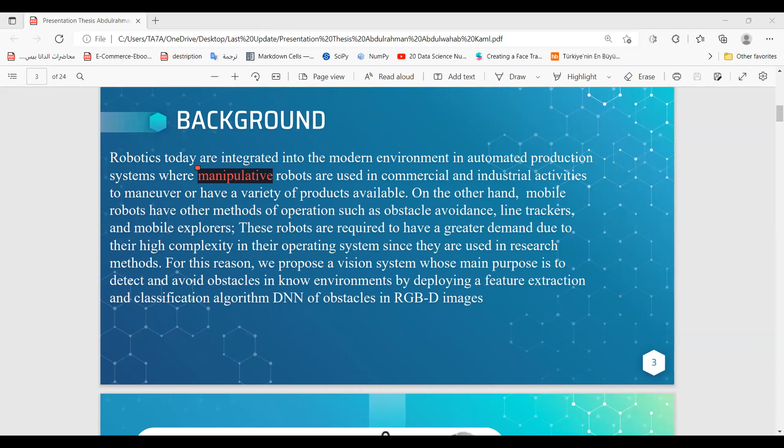If you want, let's start the first session of the symposium. The first paper belongs to Abdurrahman Abdul Wahab Al-Ahami. Are you ready? Hello. Hi. Are you ready? Yes. Okay, you can start your presentation please. Okay, let me open my camera. You can share your screen. Okay. You have 10 minutes, please. Okay.

Robot path planning with avoiding obstacles in a known environment using area segments and obstacle classification.

Introduction and background: Robotics today are integrated into the modern environment in automated production systems where manipulator robots are used in commercial and industrial activities to maneuver or manipulate a variety of products. On the other hand, mobile robots have other methods of operation such as obstacle avoidance, line tracking, and mobile exploration. These robots are in high demand due to the complexity of their operating systems, since they are widely used in research methods.

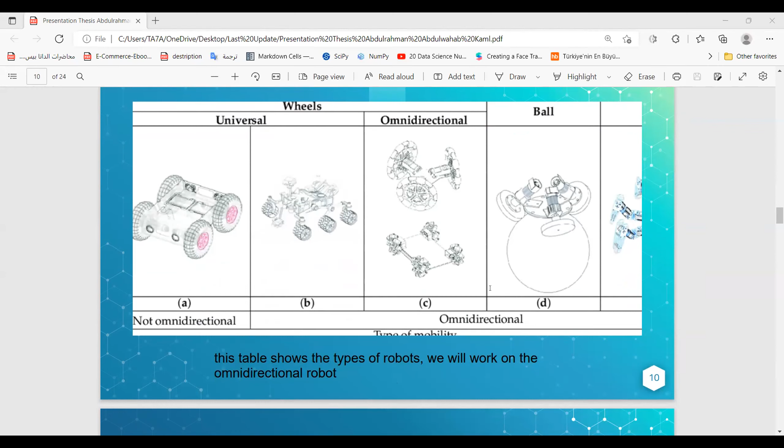Next slide: Obstacle avoidance. A mobile intelligent robot is a useful tool which can lead to the target and at the same time avoid obstacles facing it. There are conventional methods of obstacle avoidance such as the path planning method, the navigation function method, and the optimal regulator.

The first algorithm that was proposed for discussion of obstacle avoidance is the Bug One algorithm. This algorithm is perhaps the simplest obstacle avoidance algorithm. In Bug One, the robot completely bypasses the first object, then leaves the object and proceeds at the shortest distance toward the target.

Of course, this approach is very inefficient, but it ensures that the robot can reach any target using this algorithm. The current sensor readings play a key role. The weakness of this algorithm is the excessive travel of the robot alongside the obstacle.

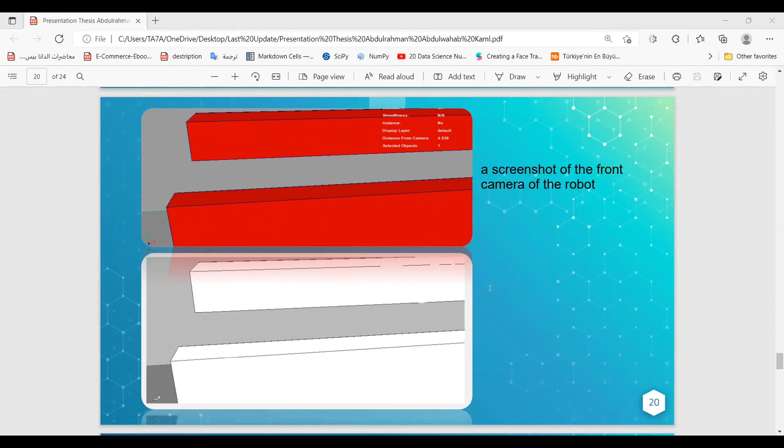Next slide. Accuracy result. Despite the fact that PSO KNN might not be the most accurate classification system, the figure below indicates that it takes the least amount of time to make choices compared to other classification systems.

Next slide. The accuracy of our model compared to other work.

The next slide, conclusion. This is the outline. This study proposed a new image-based floor detection approach in an indoor environment for autonomous mobile robots. Obstacles were detected using image segmentation and KNN classification.

Second, it should be noted that even if the obstacle and the wall are similar, the obstacle can easily be separated from the wall.

Third, additionally, as the proposed method does not require any prior knowledge of the environment, it can be applied to real-time problems.

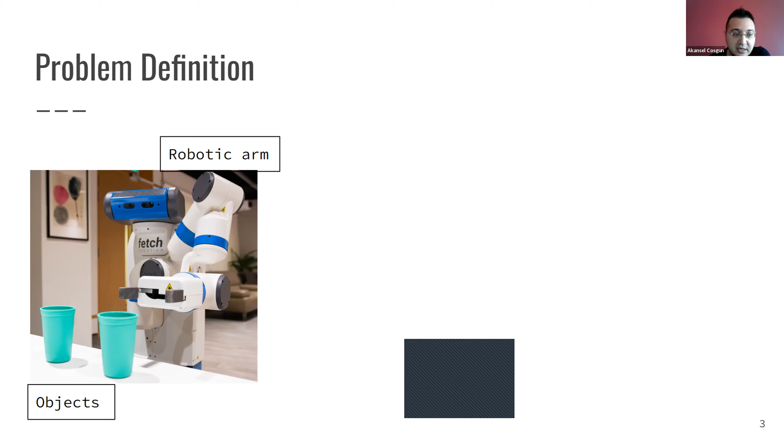To define the problem, we have a robotic arm. This picture depicts the Fetch robot. The Fetch robot is actually a mobile manipulator — it has a mobile base, but we do not use the mobile base, we only use its robotic arm. We have some objects on the table, and we have a user at a remote location who wants to control the robot.

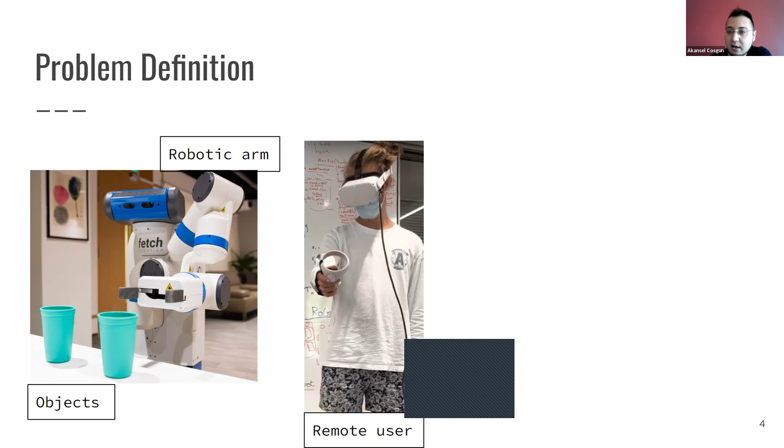This remote user is wearing a Meta Quest 2 virtual reality headset, and on the bottom right we see a typical VR view of what the remote user is seeing.

So the problem is how do we design the interface, the interaction, so that we share essentially a shared control, so that the user does not control every aspect of the robot. There is some autonomy that helps the user carry out the task, to be able to manipulate objects in the environment. Here's our approach.

We use a VR headset, a Fetch robot, and there's an RGB-D camera at the head of the robot. We visualize the sensor data in two forms: we project the point cloud into 3D space, and we also show the video stream projected onto a wall in virtual reality.

The control happens by the remote user choosing and setting the next waypoint, where we define the waypoint as a position and orientation of the robot's hand, the end effector. We check for the feasibility of the next waypoint and communicate that via visualization to the user, whether it's feasible or not. In the back end, we use a general purpose motion planner to check for feasibility and to move the actual arm.

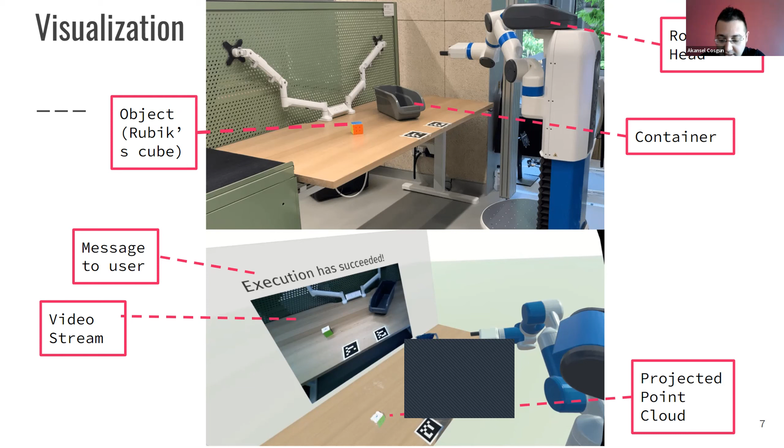Motion planning is responsible for solving for the joint positions of the robot arm to go from one robot configuration to another robot configuration.

In our design, when the user moves the controller, we visualize the robot's end effector in that location, but nothing happens until the user presses a button. When the create plan button is pressed on the controller, we check for the feasibility of that end effector configuration. If this pose is feasible, then we display the end effector as green. If not, we display it as red, so the user knows whether it's feasible or not.

In the back end, we use MoveIt, which uses RRT-star for motion planning. If a feasible trajectory is found, the user can press another button to execute the trajectory, and then the actual robot arm moves. The idea is to have human-in-the-loop control, doing this iteratively multiple times until the user reaches a desired goal position. We also have another button on the controller to close and open the gripper accordingly so that objects can be manipulated.

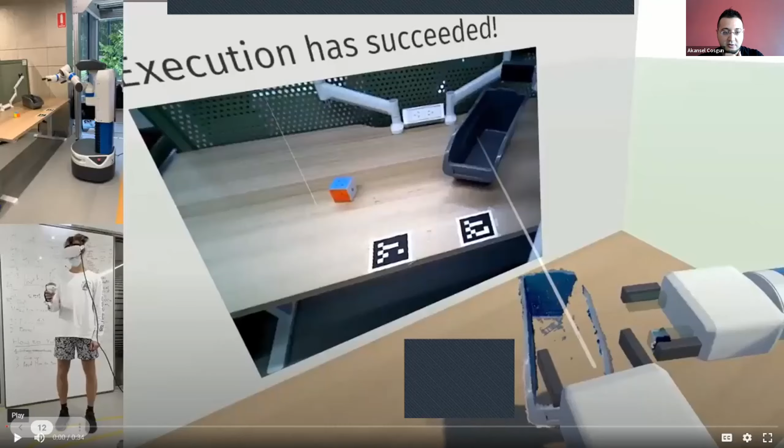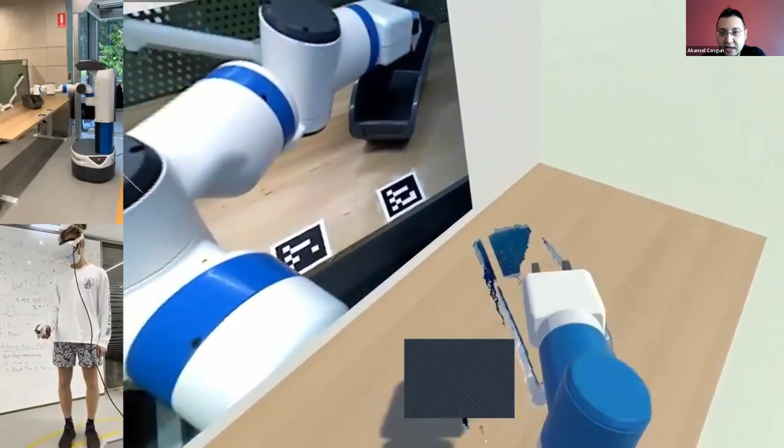Hopefully this works. On the right, the larger screen, you see the virtual environment. On the leftmost, you see the actual robots. So what the user is trying to do at this stage is move the arm to pick up the Rubik's Cube, essentially trying to find feasible arm locations. Then the arm will descend to a position to pick up the cube. The user sometimes uses the point clouds, sometimes the video stream, then moves on top of the container and opens up the gripper.

So there are limitations to the current work. For instance, sometimes the visualized point cloud is incomplete, and that's because the robot arm itself might block the view, coming in between the RGB-D camera and the object of interest.

So there are ways we have thought about this. For example, we can move the arm more intelligently so it doesn't block the view, or we can detect the objects on the table and show their 3D object models to help with occlusions. Or we can combine multiple point clouds from multiple viewpoints. However, this will only work if the robot is stationary and not mobile.

The other main limitation was that the user tries checking the feasibility multiple times, which is time consuming. A single manipulation action takes a long time, even for trained operators. So the idea is, in the future, if we can add more autonomy to suggest kinematically feasible options to the user before they try them.

To conclude, we have found that integrating the system was actually a lot of work, and the remote teleoperation was difficult and rather slow. This is why better and more careful user interface design is necessary for simultaneous interaction for this task. Our approach was a first step towards this direction.

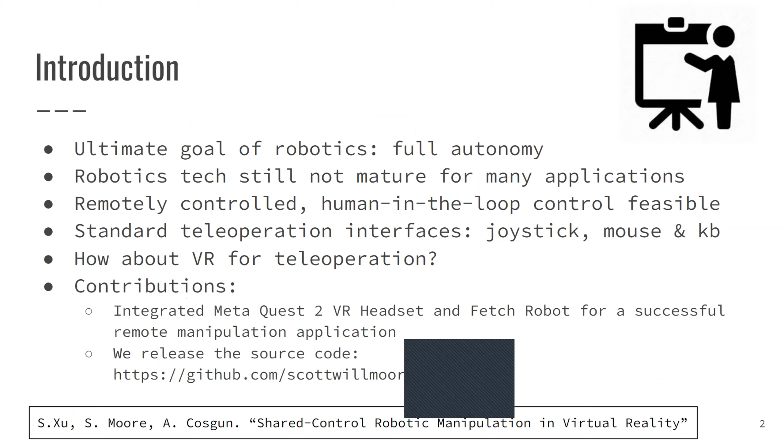Sure. Yeah, I like the presentation, the idea here for the virtual reality. In terms of the robotic gripper, I mean in terms of the grasping, have you tried any other gripper for this specific issue?

Well, we only tried a parallel gripper, which comes by default with the Fetch robot. However, I think if we had like a vacuum gripper or a more multi-fingered hand, the user might need, or we might need to add more autonomy to plan for the fingered motions, for instance. So we deliberately used a simple gripper for proof of concept, but I think it's an interesting problem how to tackle this with a different gripper.

Yeah, you are right. Because from my side, I work on soft robotic grippers. Maybe it could be great to try this kind of gripper in this issue. Yeah, interesting, maybe in the future. Thank you for the question. Yeah, thank you. Okay, thank you.

Any other questions? Okay, well, thank you for the opportunity. Thank you for your presentation again. Thank you, I wish you success in your career. Thank you.

The next study belongs to Omar Al-Mutalbi. Dear Omar Al-Mutalbi, are you ready? Mr. Savaş Dilibal, are you ready to present? Maybe your voice is... Oh yeah, okay. Can you hear me now? Yes. Yeah, sorry, my voice was off.

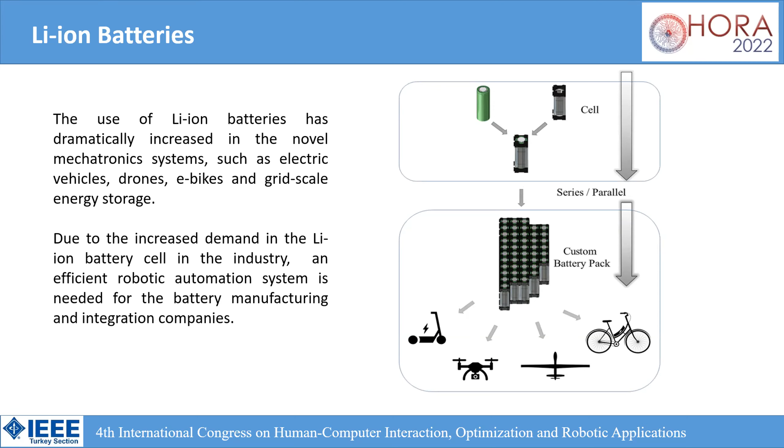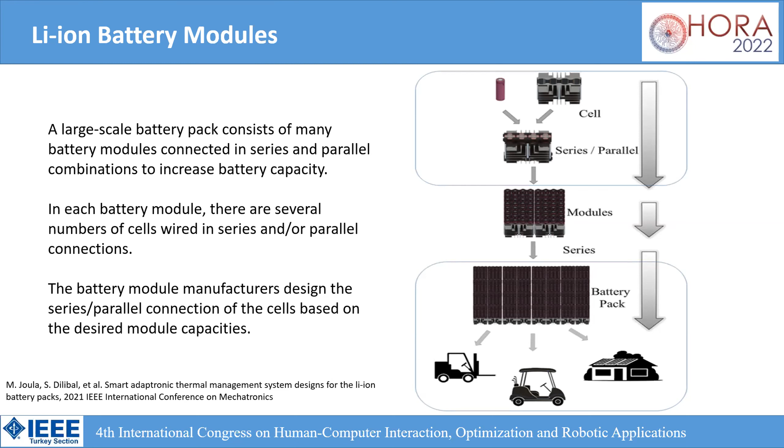A large-scale battery pack consists of many battery modules connected in series and parallel combinations to increase battery capacity. In each battery module, there are several numbers of cells wired in series and parallel connections. Battery module manufacturers design these connections based on the desired module capacities.

In industry, lithium-ion batteries come in coin, cylindrical, prismatic, and pouch formats with different capacities and sizes. The cylindrical cell is the most widely used package type due to its standardized sizes and simple manufacturing process, making it the most commonly used battery in applications.

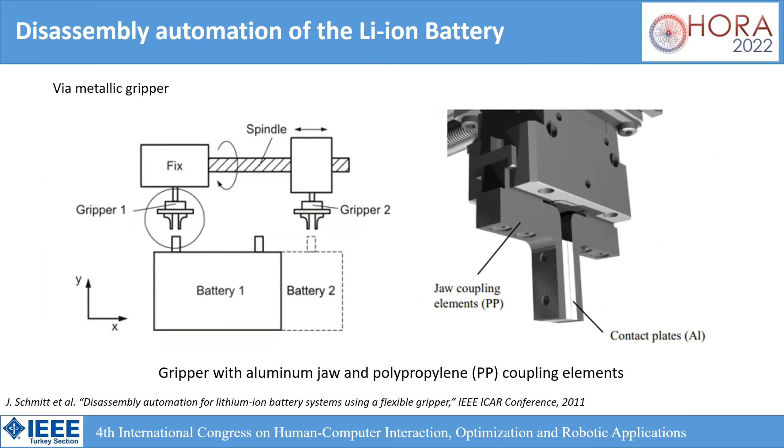In the literature, you can find some disassembly automation of lithium-ion batteries, as shown on the slide. Packaging and pick-and-place of lithium-ion battery cells can also be found in industry with metallic gripper jaw systems.

However, soft robotic grasping for lithium-ion batteries has different advantages: reducing the damage risk compared to rigid grippers, self-insulated soft robotic gripping for pick and place tasks, easy integration with collaborative robots, and coherent operation with cobots in active and passive missions.

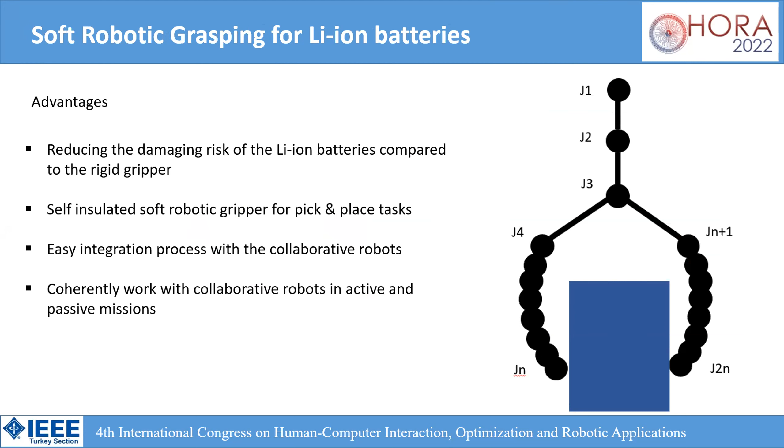In this study, we worked on a FANUC collaborative robot with a 10-kilogram payload, and we developed a 2-finger soft pneumatic gripper, which is additively manufactured and integrated into the cobot system. A silicone layer has been bonded on each finger surface for soft grasping.

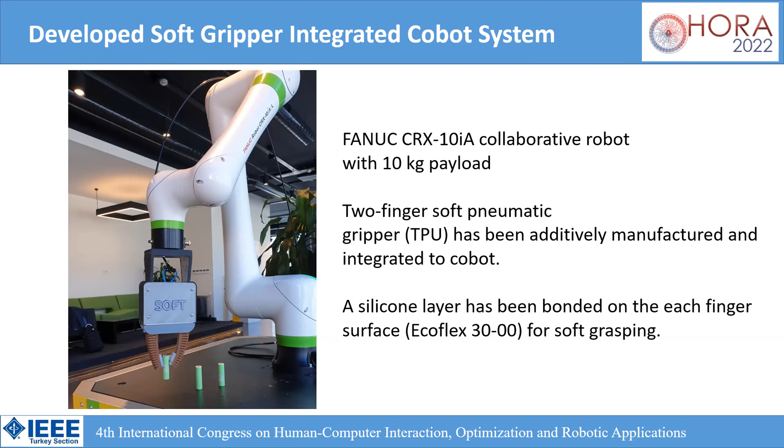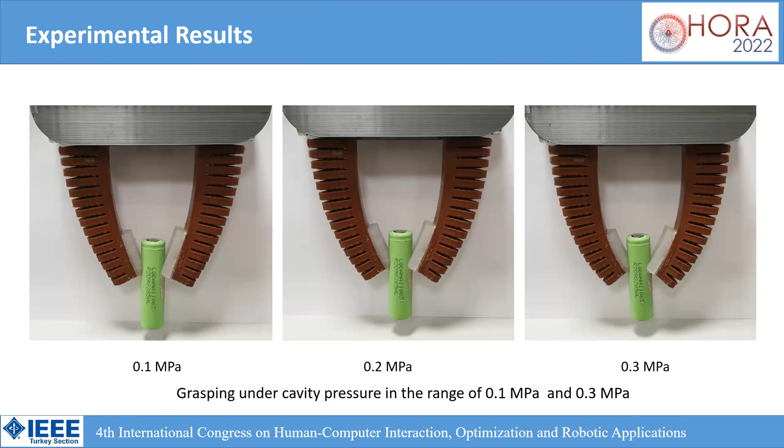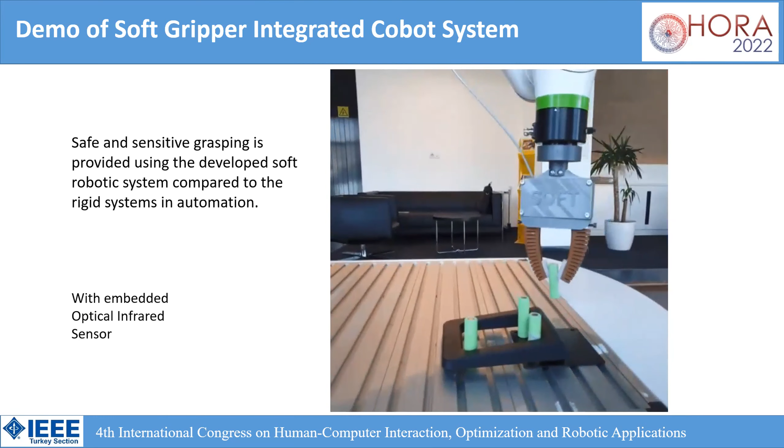In this slide, you can see a demonstration of the soft gripper integrated cobot system. Safe and sensitive grasping is provided using the developed soft robotic system compared to rigid systems in automation.

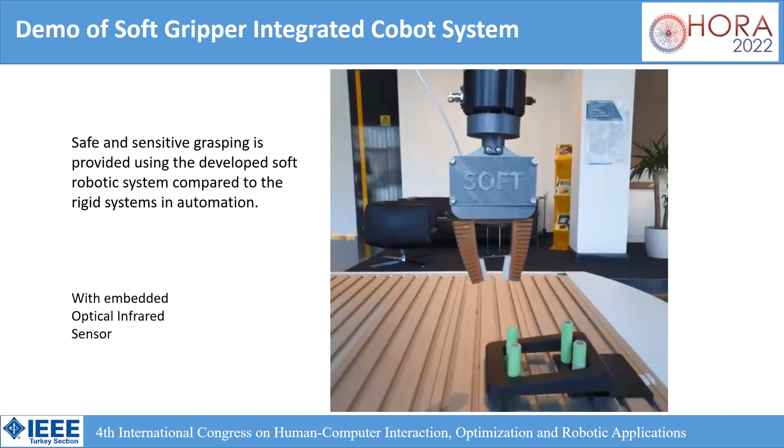We have used an embedded optical infrared sensor in this system. Here you can see the infrared optical sensor data up to 5-fold, which is embedded into the silicone layer.

We have also measured the gripping force, and you can see the plot of applied pressure versus gripping force here with our experimental setup for measuring gripping force.

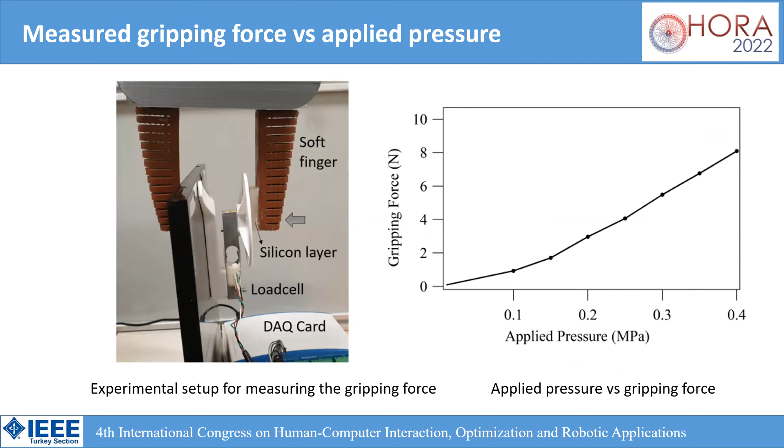In conclusion, the grasping of lithium-ion batteries was achieved successfully using the additively manufactured soft pneumatic gripper with contact sensing, limiting both damage and slippage.

The Yeoh material model-based numerical results accurately predicted the experimental responses of the soft pneumatic gripper at cavity pressures up to 0.3 megapascal. The control architecture is built with data from both exteroceptive sensing and FEM to accurately regulate the cavity pressure in the grasping task.

In future work, an enhanced multidisciplinary collaborative effort will be given to achieve in-field studies. Thank you.

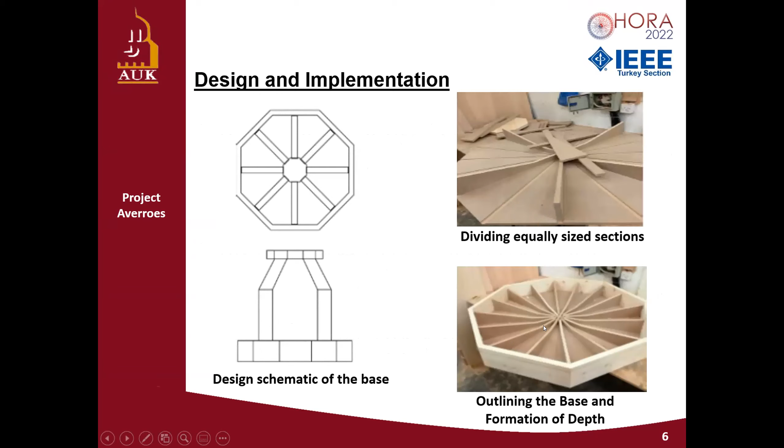This wooden base would constitute the platform where the user will be able to safely interact with the virtual environment. This figure illustrates the equally divided sized sections of the base's bedrock, and here we are outlining the base and the formation of the depth, which is 20 centimeters.

The base was then covered with the standing board. This is again calibrated to suit any person's spatial performance in the virtual environment. So this is the final base without the carpet inserts.

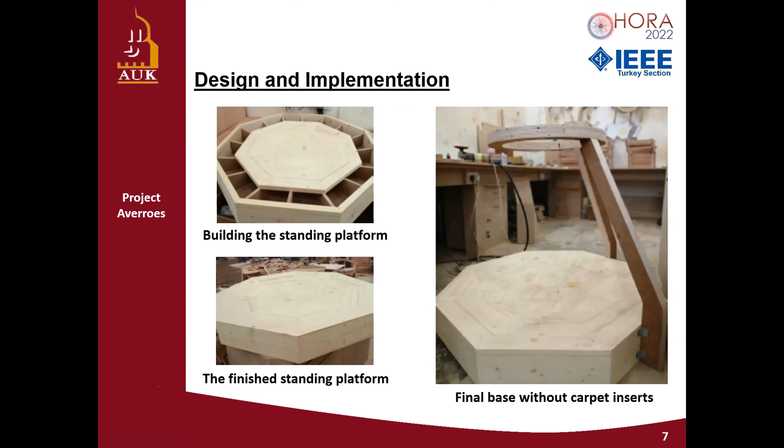The carpet inserts were then glued on top of the octagonal foundation to integrate the virtual sandal component of our wholesome concept into the system.

Moreover, the system includes an Oculus Rift and a desktop monitor for integration between the software demo and the tangible hardware moving parts. The microcontroller used here is an Arduino Uno R3, which was chosen because of its availability and its suitability for rapid prototyping and continuous testing.

In addition, we had two optical navigation high-end gaming sensors that were used to interface with the Arduino. The optical motion sensors are inserted in the soles of customized sandals that are embedded with carpet sliders. The carpet sliders help the user smoothly maneuver about the base platform.

This figure depicts a pair of placeholder test sandals that have optical sensors and carpet sliders inserted at their soles. We should also mention that several types of sandals with different inertia ratings and insole materials were tested and evaluated accordingly.

For the analysis, readings from the sensors were done by first examining the motion interrupt pin embedded in the sensors. When the sensors detect motion, the pin is set, informing the Arduino that the values are ready to be read from the sensors. These values are 16-bit for both X and Y axis, 8 bits each of the detected motion.

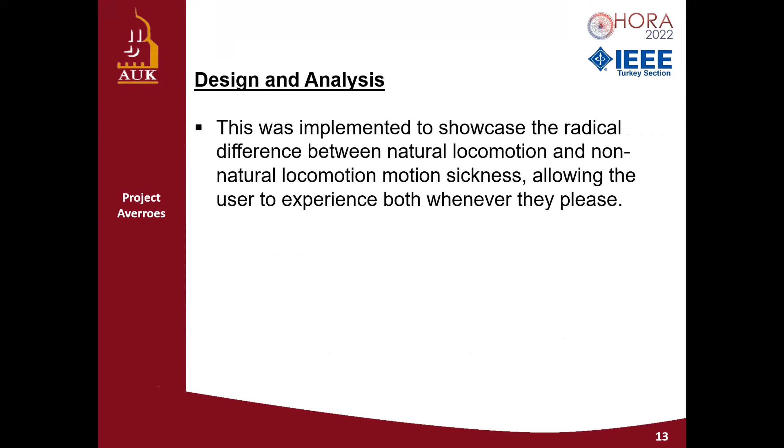But we were avoiding this method because it causes nausea and motion sickness. It was implemented to showcase the radical difference between natural locomotion and non-natural locomotion sickness, allowing the user to experience both whenever they please.

So the final product of our proposed integrated locomotion solution was assembled and tested successfully. The test subject stepped into the VR base platform wearing the sandals, placed the Oculus Rift harness, and strapped the Arduino Uno R3 with a Velcro fastener, then proceeded to play the developed virtual reality game. The test subject described an adequate level of immersion compared to traditional VR gaming experience. Here we can see the VR experience setup of Project Averroes.

I will leave you now with a video presentation of the student demonstrating Project Averroes, focusing on the construction of the omnidirectional treadmill and on tracking foot movement.

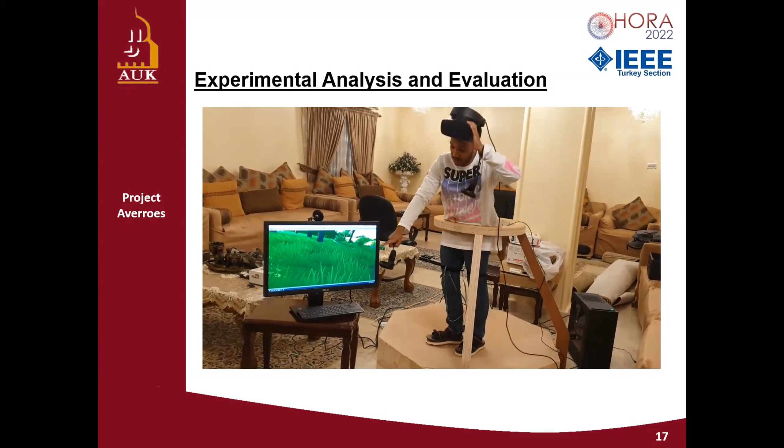Hello, this is Nareem Diab from Project Averroes, a senior capstone design project which focuses on creating an omnidirectional treadmill. What we've implemented today is a sensor that tracks your foot movement, tracking one-to-one foot movement in VR. Now I'm going to put my VR headset on, and as you can see from the screen, which is basically what I'm seeing, it looks very natural while walking.

As you can see in this demo, my hands are working perfectly, and I can just take a simple stroll. All you have to do is walk naturally. You can of course change directions, and it tracks that too. We've also implemented a way to move using the joystick, however this is what we're trying to avoid because it causes nausea and motion sickness. So what we're basically trying to demonstrate right now is how efficient and how much less motion sickness you'll get once you use our project.

Finally, one of the significant challenges faced was devising a way to prevent flex in the sandals. Due to the optical laser's functionality, it needed to be approximately 1 to 2 millimeters above the ground at all times in order to track movement accurately. For that, there were two proposed solutions: one is adding a wooden support underneath the sole of the sandals to prevent flexing, and the other is adding a third carpet slider in the midsole to help prevent flex. That's it, thank you for listening.

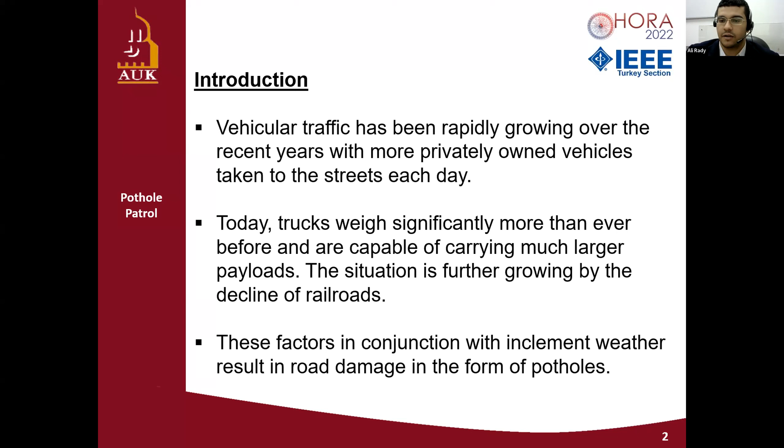Potholes do not only cause damage to vehicle suspension systems, but may, in severe cases, result in serious accidents and permanent injury. We actually had an incident last year where a gentleman lost his life due to a pothole and a manhole cover damaged by the pothole. Another major problem is the process of fixing these potholes. Problems within the fixing process include multiple constraints such as convenience, area, and time consumed. Therefore, the availability of an automated machine that can perform all these tasks would be much more convenient and practical.

The main objective of this paper is to develop an automated vehicle capable of moving uniformly on the street to locate potholes and road impairments. Once a pothole is found, a dispensing mechanism is initiated in order to fill that road cavity with some sort of road repair material or asphalt. To inform daily roadway users of the existence of the pothole, a software application is made to allow users to flag that pothole on a map.

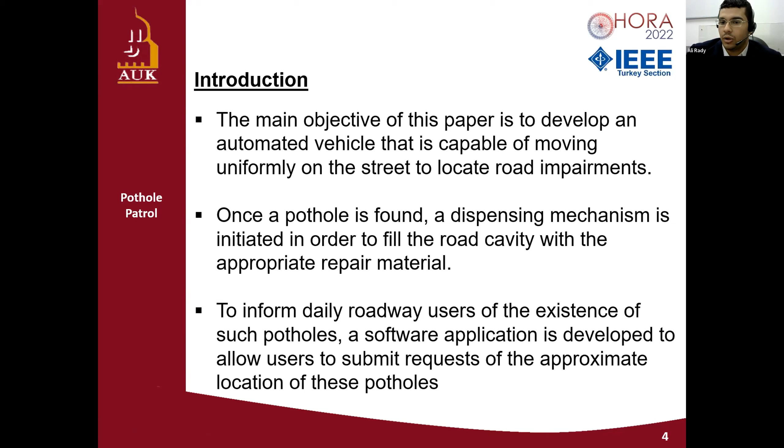Another application is developed for the administrator side to provide them with any necessary tools to view and process user requests. The system architecture of Pothole Patrol starts with a mobile application for the user and a mobile application for the administrator's workstation. Both communicate with each other through a database server.

When a user encounters a pothole while traveling on a roadway, they can report it by specifying the approximate location using an integrated map on the application. Once a user specifies that location, a request is added to the database. The administrator can then view that request and deploy the repair vehicle to the location of the pothole. The administrator activates the vehicle through the workstation application, and the system operation begins to try and fix the pothole using the machine.

Components used include the RC tank car truck robot chassis. It has strong stability with four powerful motors able to deploy it on the road in rough conditions. The chassis has an independent suspension shock, which allows it to run on uneven road surfaces given the size of the pothole.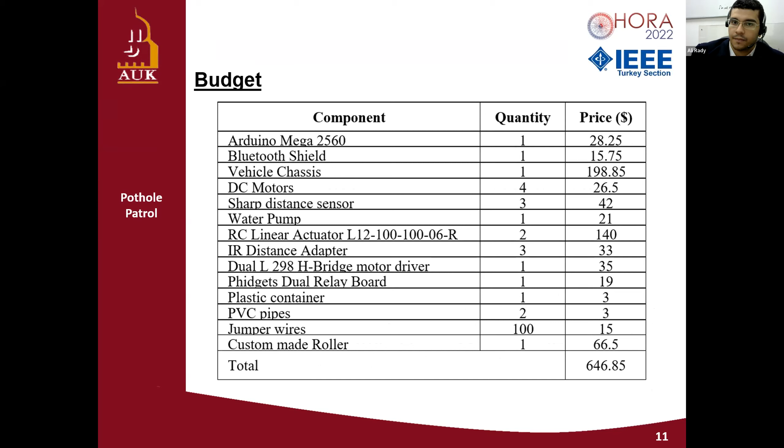In the implementation, the user can control every aspect of the Pothole Patrol manually. However, there is an automatic option that starts and controls the process. If automatic is chosen, system operation begins with a detection process, which requires the use of the IR sensor. The vehicle moves forward while the sensor performs continuous scanning, keeping track of the distance from the ground, trying to detect the pothole.

The basic idea is to find the location of the road impairment as the car travels forward, which allows the vehicle to roll back so it can be positioned over the pothole's center. It detects the distance from the ground and sees where the distance starts changing, detecting the road impairment. Once it reaches the end of the impairment, it rolls back to the center of that pothole.

To record the exact distance required to reach the center, a counter is added to the Arduino code, so the robot moves discretely once it starts detecting the pothole. The counter will not increment unless a change in distance is detected by the sensor, implying that scanning of the pothole has begun.

The vehicle stops moving once it reaches the end of the pothole. Afterwards, the rollback operation is initiated, allowing the vehicle to move backward for half the value obtained by the counter, essentially reaching the center of the pothole.

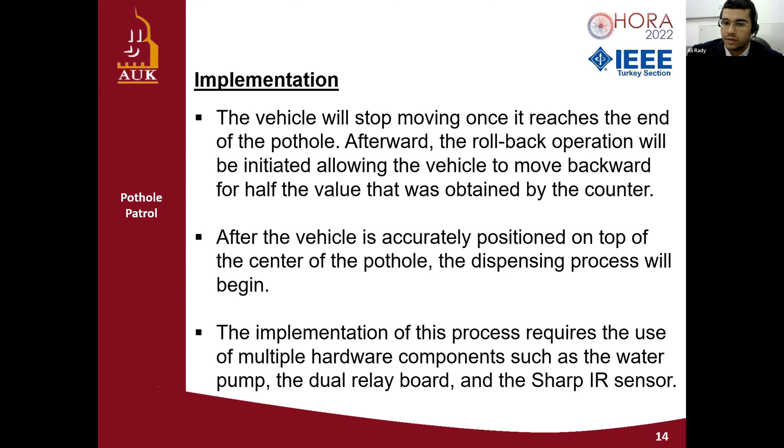After the vehicle is accurately positioned on top of the center of the pothole, the dispensing process begins, which dispenses some form of asphalt or filler repair material to fill the pothole. This requires multiple hardware components, such as the water pump, the dual relay board, and the IR sensors.

Once the vehicle is centered, the repair material is deployed into the pothole through a plastic pipe. The IR sensor performs continuous tracking of the resin levels being poured in. The ideal distance, essentially the distance between the vehicle and any level ground with no road impairments, is registered as the level you would want to fill up to.

The values received by the IR sensor are continuously compared against this ideal distance. If the two values become equal within some error margin, meaning the level of the repair material reaches the level of the surrounding roadway, the dispensing stops.

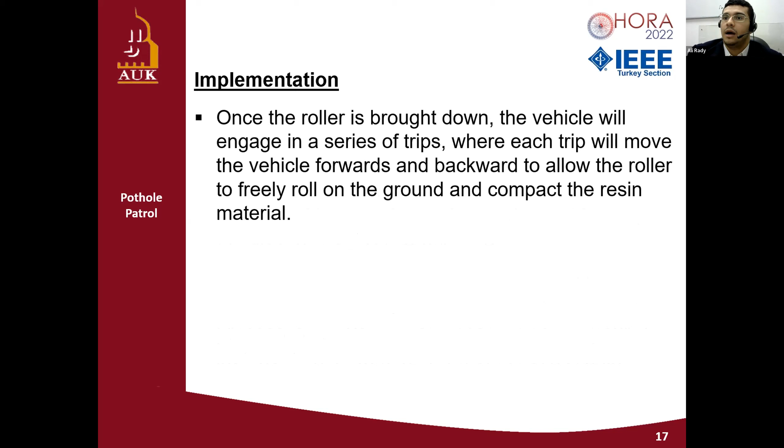Finally, the process compacts the material using a roller. The main objective is to level the material poured into the pothole with the level of the surrounding roadway surface. Once the roller is brought down using the actuator discussed before, the vehicle engages in a series of trips back and forth to level the material and compact the resin.

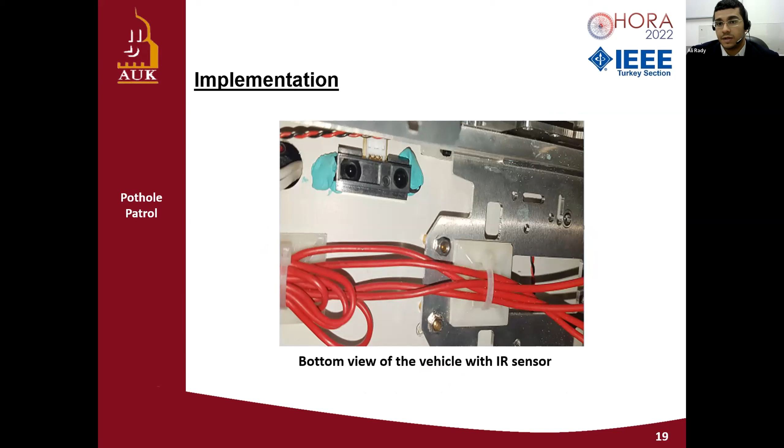This is a bottom view of the vehicle showing the IR sensor. This IR sensor would be detecting the distance from the ground and the pothole.

To report a pothole in the street, the user would launch the application, enter their civil ID or any kind of their own identification into the main screen, pin the location of the pothole on the map, and then submit the request. An HTTP request containing that user's identification, latitude and longitude, basically the pin of the place on the map, is sent to the servers, and these parameters are saved in the database. When the request is completed, it will be deleted from the database.

Future works: several improvements can be done upon this project to enhance its overall functionality, such as implementing a suitable mechanism for mixing resin material with water. So you would have more than one container and you would mix all these materials together before pouring them into the pothole. Incorporating a larger size pump that is capable of pushing repair material that is of higher density.

Basically not all material can be pumped using all kinds of pumps, including some form of heating apparatus to heat the compact roller to create a better bond between the dispensed material and the surrounding roadway. So when the solid material is heated, it will have better bonding with the newly freshly added mixing material. So this is also in the future works.

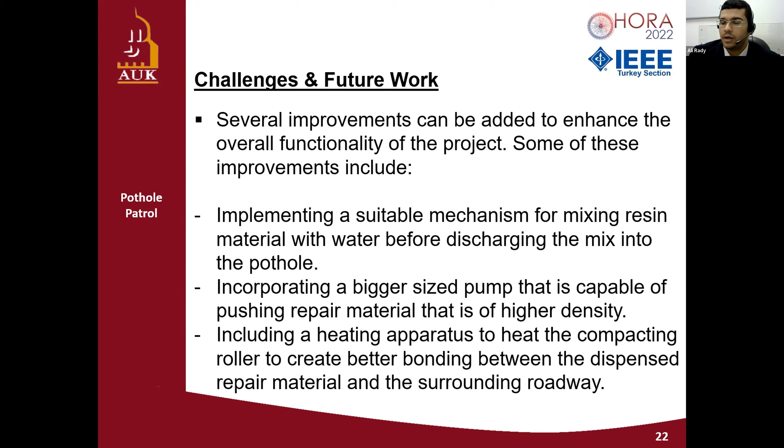Thank you. Any questions? Thank you for your presentation. Dear participant, do you have any question about this study? Okay. Thank you again. I wish you success in your career.

Dear Ali Rady, will you present the next work? Yes, I will. Let me just check. Okay, you can start your presentation. Just one second. Said Esmaili seems to have been written as a speaker. Yes, just one second.

Share screen. All right, can you see the slides? Yes. All right, this is another project done by the American University of Kuwait in partial fulfillment of a Bachelor of Computer Engineering / Electrical Engineering.

This is vGrip, virtual reality in a grip, essentially a tool to help people better interface with objects in virtual reality.

Virtual reality and augmented reality are becoming an increasingly popular tool for education, training, providing hands-on skills, and entertainment. Usually VR focuses on the senses of sight and sound. However, touch for many applications is equally important sensory feedback. The use of touch becomes particularly essential in training applications to train pilots, astronauts, in military operations, law enforcement, medical research, planning, and rehabilitation. Virtual reality can be used when constant guidance is required for repetitive tasks.

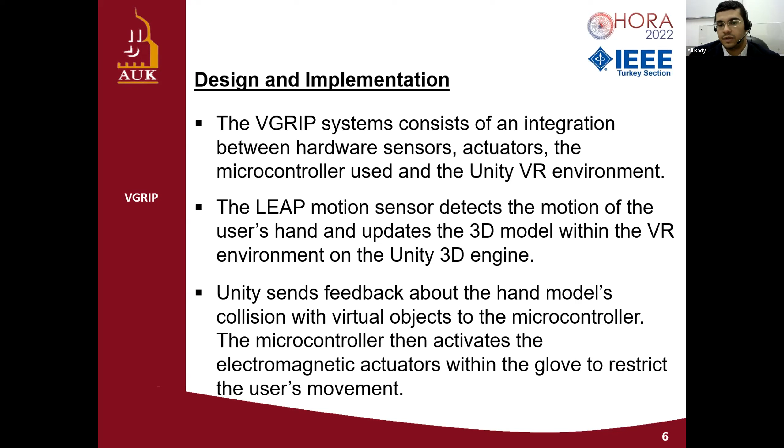The glove is a customized glove made of durable fabrics consisting of two main parts: the holder and the fingertips. There are electromagnets to restrict the movement of the fingers. The holder contains 5 electromagnets, and the fingertips are connected via strong threads passed through the electromagnets, between a metal sheet and the electromagnet. When the electromagnet is activated with a variable force, the finger's movement is restricted by applying force on the metal sheet, holding the thread in place and restricting the movement of the finger and hand.

The Leap motion sensor provides precise tracking of hand movement as feedback to the Unity 3D engine. The motion sensor is flexible and can be set on a desk or mounted on a VR headset, depending on the user's convenience. The Leap hand model was customized for vGrip to allow detection of collision with world objects.

Unity was used as the main processing software in which the VR environment was created, collisions are detected, and decisions to switch the electromagnets were made. There are 3 main modules developed with the Unity engine: the hand 3D models with its physics engine, collision detection, and a serial controller to interface with the physical glove, as well as virtual objects to be played with in the VR environment.

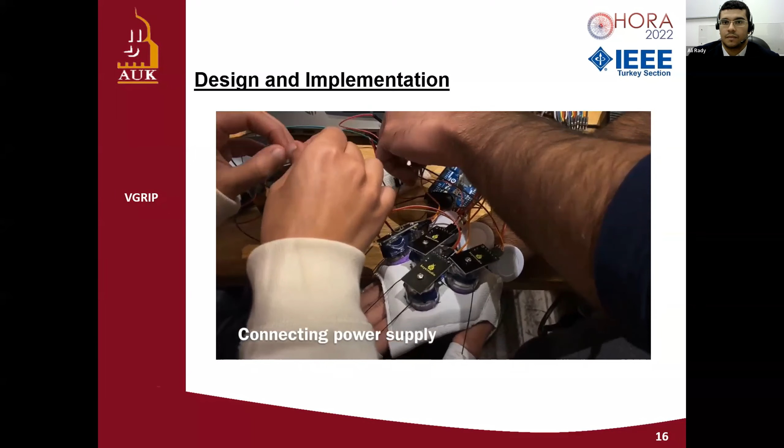Yes, it's just music, it's okay. There's not much to hear.

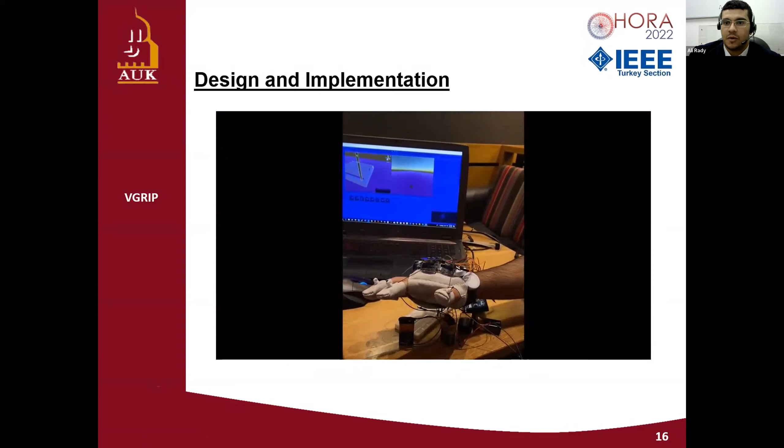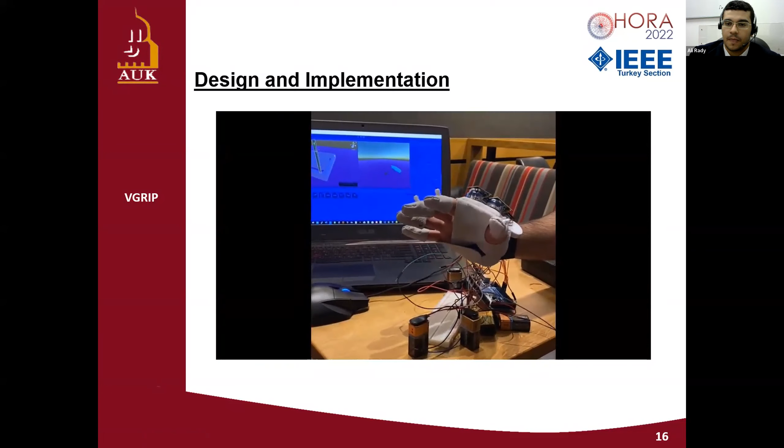As you can see here in the demo, it's moving in the virtual environment, and shortly he will attempt grabbing an object. As you can see, he's grabbing an object in the virtual environment and manipulating the cylinder.

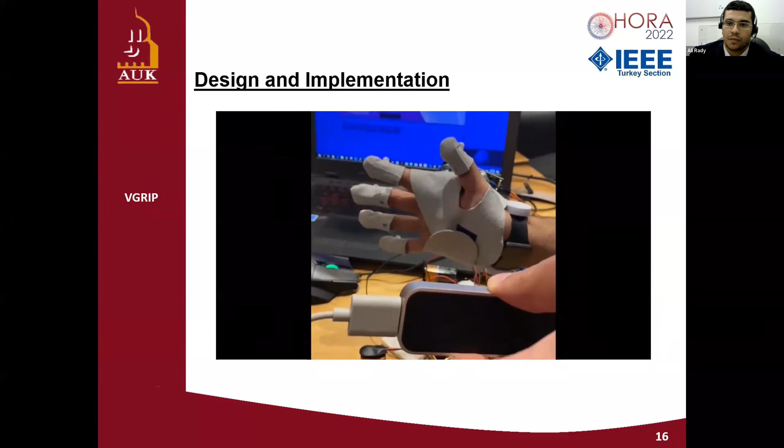All right, so in conclusion and for our future work, the electromagnets used for the project are not incredibly strong. However, they are safe and robust and easy to change.

For example, if you use motors and apply too much force, you can break the motor. Here, the point of failure is the thread, and if the thread cuts, that's easily changed even by the user, and it does not require technical skill.

As future work, a stronger magnet is needed in order to exactly stop the hand for the desired amount of time and release it at will. Also, using a wearable microcontroller instead of a regular one in order to enhance the user experience.

Interfacing with other VR engines such as the Unreal Engine, not just the Unity 3D VR engine. And thank you. Any questions?

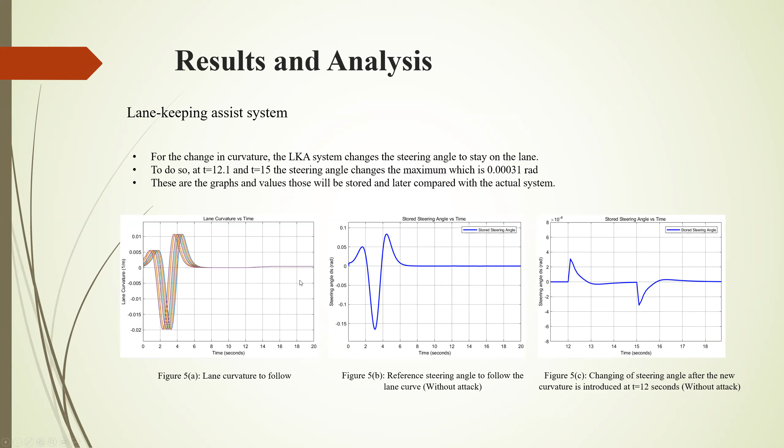It also can change depending on the timing range. If we make the attack before 10 seconds or 8 seconds, or after 18 seconds, the results will differ from this. So these are the detection system results.

It continues to alarm for 20 seconds, and it will stop the detection alarm only when the driver takes control over the vehicle.

So in conclusion, we could see that the attacker makes the system follow the previous signal by delaying the control signal in the controller-to-actuator communication system. They could also attack the sensor-to-controller or system-to-sensor communication. Wherever they want to attack the system, they can.

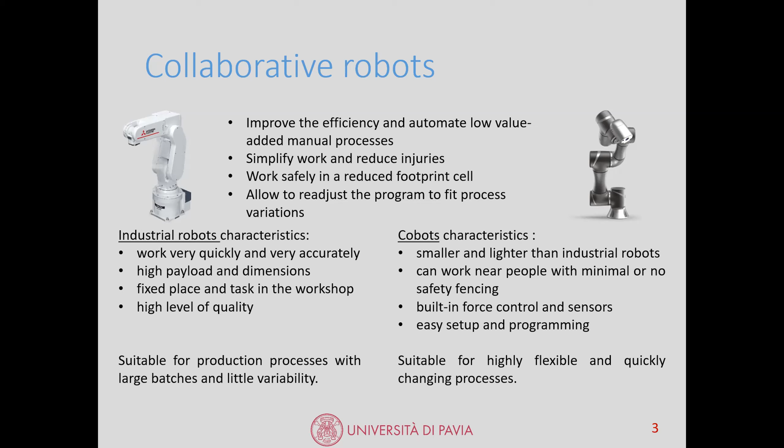Since these intuitive interfaces and user-friendly robot programming are studied in many academic researches, we want to fill the gap in presenting the industrial collaborative application. We want to highlight the relevant robot programming phase and the structure of the program. The robot programmer has to conceptually develop and optimize the robotic cell, select the sensors to be used, and foresee the interaction methods to allow an easy modification for the final program.

However, we have to consider that the final robot user may not be the same person that has programmed it. So we should allow to easily alter this program, and although many programmers may find the intuitive, user-friendly methods tedious and limiting with respect to classical text-based programming, they have to use them to open to a more collaborative programming involving the operators in a customization process.

To do so, the programming phase has to foresee the following steps. First of all, the initialization step with respect to the identified process to be automated. Then the authoring phase, which involves the robot in program creation from scratch. The authoring scope that contextualizes the program. The programming robot capabilities have to be taken into account with the corresponding programming method, and the programming features have to be chosen wisely to allow further editing and debugging phases and the verification.

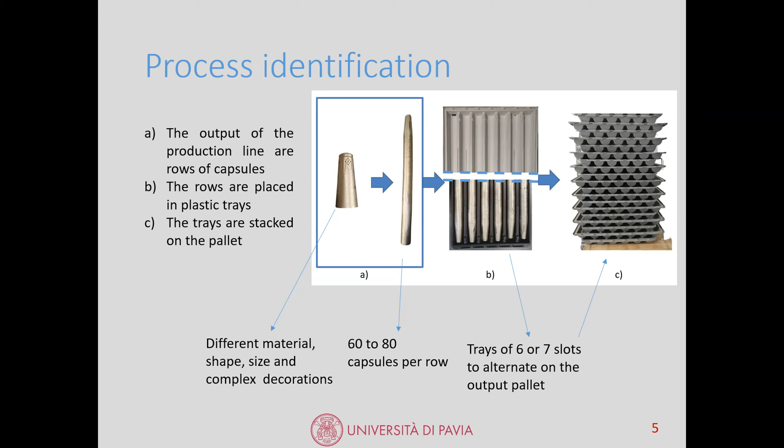Since the items that have to be displaced are completely different, and the rows of capsules are smaller and have different size and shape with respect to the trays, we have foreseen to use 2 different grippers.

The robotic manipulator that we decided to use is the Omron TM12, which has a built-in vision system, a force control capability, and can be programmed with a visual flowchart-based language.

The 2 grippers are: one with 4 vacuum caps and jigs for robust coupling with the surface of the tray, and the other one has 10 vacuum caps, smaller, to be able to pick up the row of the capsules.

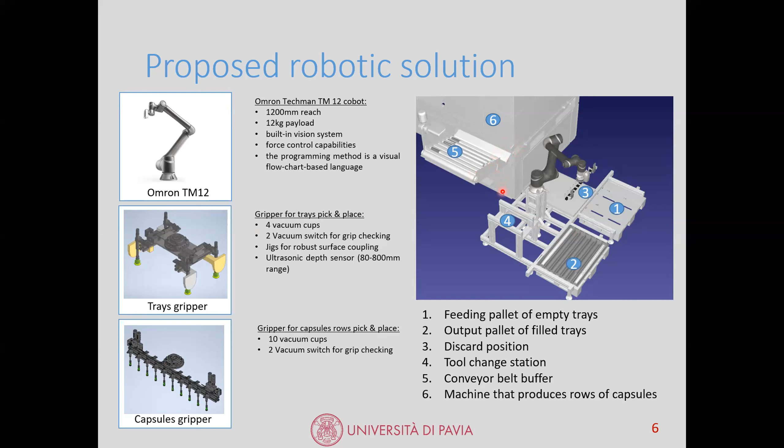The proposed layout has been firstly designed and simulated through use of RoboDK simulation software, and this way it was possible to verify the reachability of all the relevant points in the robotic cell. The robotic cell layout has been schematized on the right.

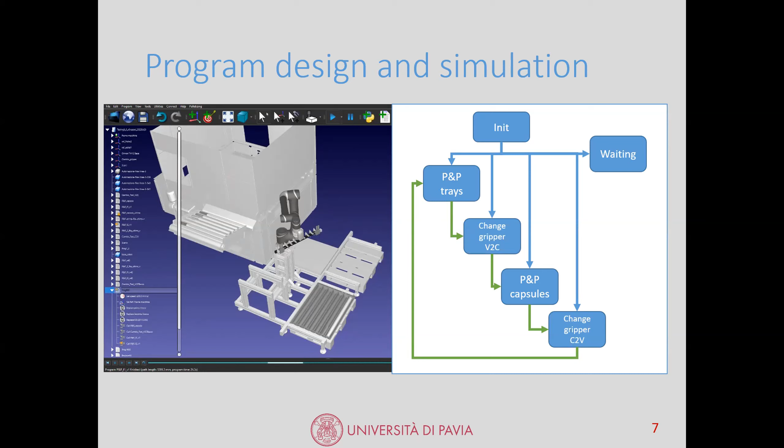The program is designed to have 2 main routines of pick and place of trays and capsules, 2 gripper changes, and 2 more supportive subprograms. The generated program seems to be quite easy unless we don't consider the practical programming features that are quite challenging, especially if the program has to be general, flexible, and understandable.

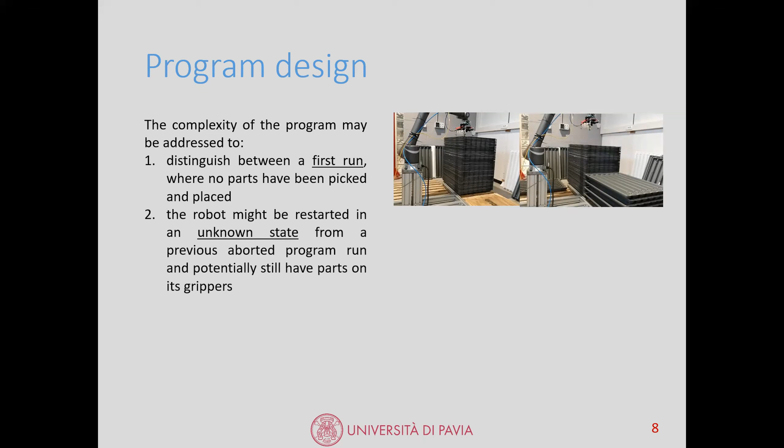Coding the decision tree can be a substantial effort, especially when the number of decision and error cases is quite large. Programs often have several logical decisions to make, such as when and how many times to repeat an operation, like distinguishing between the first run of the cycle and restarting from an unknown state, which is quite challenging to code in a visual programming language.

An example can be very much complicated. And to overcome these complications, we have to program some more features, such as nesting, loop management, parallelization, and branching for conditional instructions.

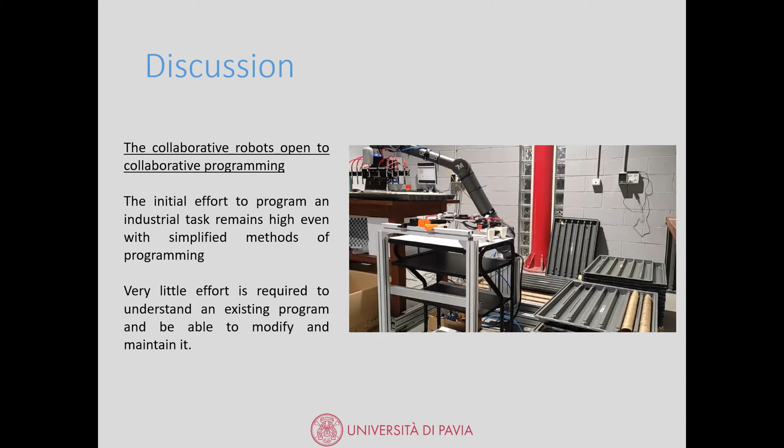However, if we use those features of parallelization and nesting, and clearly define the branches that define each robot motion, it requires little effort to understand the existing program and to be able to modify it.

So at the end, the industrial task of the palletizing process was developed, and the features of the task were described, and the challenges have been highlighted considering the recent research of simplified robot programming.

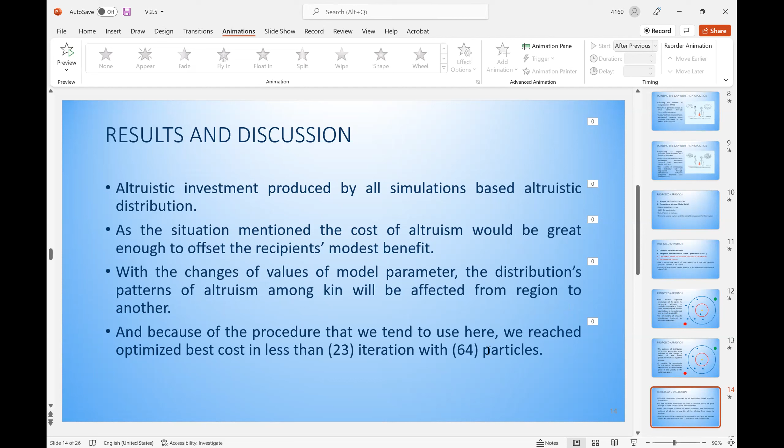With the change of value of the model parameter, the distribution patterns of altruism among kin will be affected from region to region. Because of the procedure we tend to use, we reached the optimized best cost in less than 23 iterations with 64 particles.

As we can see in our simulation, all the particles will be close to each other in the first and second region, and the optimum and current position of the particle will drag all the particles to the first region in order to be in a close condition to the optimum position.

We can see the particles' region distribution from the first iteration to the 23rd iteration. It starts with 64 particles in the first region, then jumps to the second region, then jumps to the third region, and from the fourth iteration to the 12th iteration, the proposed approach dragged all the particles back to the first region effectively by the 12th iteration.

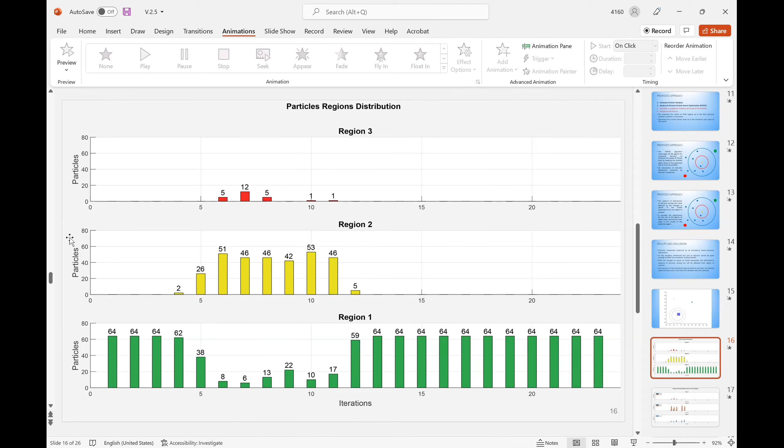We can see reciprocal altruism between the second and third region, with donor particles shown in blue in the second region and recipient particles in blue in the third region. In the 6th, 7th, 8th, 10th, and 11th iterations, we have donors from the second region to the third region in order to drag them to the second region.

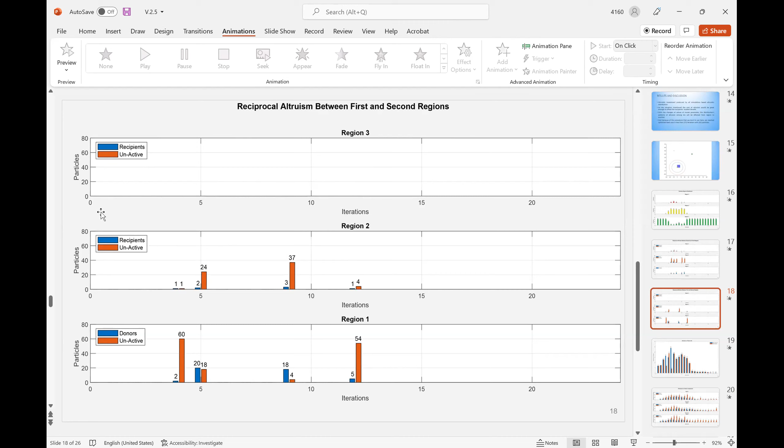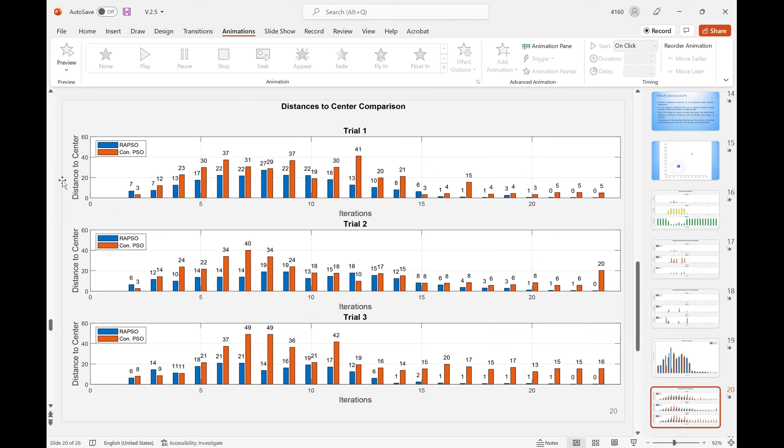This is the distribution of particles and distance to center comparison between RAPSO, our proposed approach, and canonical PSO. As we can see, the distance in red, which is canonical PSO, is more than the distance from RAPSO, and this holds to the last iteration in the 3rd trial. In our proposed approach, we reached 0, or the optimum position, in the 23rd iteration, but in canonical PSO in the 3rd trial, it is not reached.

As a conclusion, a novel optimization algorithm with explicit reciprocal altruism is proposed for working on path planning, namely reciprocal altruism-based particle swarm optimization, RAPSO. It can quickly find the particles that are far from the optimized path to tweak them after evaluating its scenario according to a kinship relatedness with the change of 2 conditions of that particles.

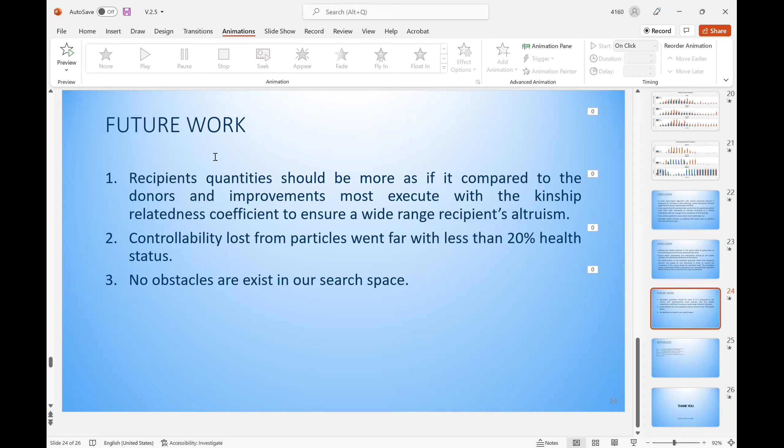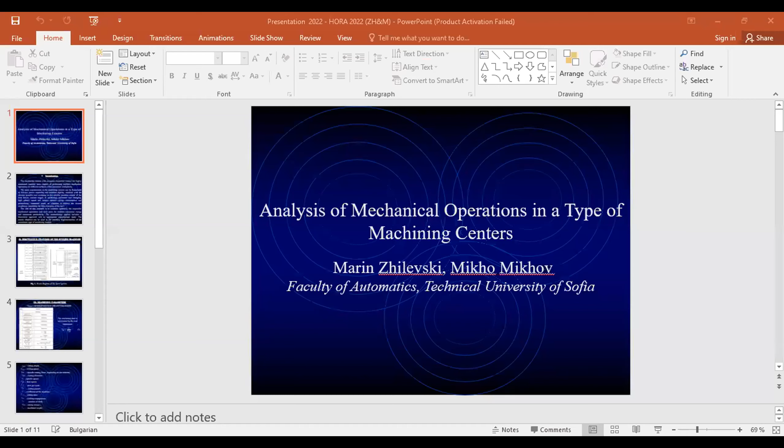Yes, thank you. Hello, my name is Marin Zhilevski. I am Associate Professor in Technical University of Sofia. I will present you the paper, Analysis of Mechanical Operations in a Type of Machining Centers.

The machining centers with computer numerical control are highly automated machine tools capable of performing multiple mechanical operations on different surfaces of the processed workpiece. There is a wide variety of construction, dimensions, and automation degrees of these machine tools. In general, they can be classified into 3 types based on their structure, namely horizontal, vertical, and gantry ones.

The multiple mechanical operations place high demands on the respective electric drive system, requiring an optimal selection of motors, power converters, sensors, and mechanical gears. The drive systems of the study machine include feed, spindle, and auxiliary drives.

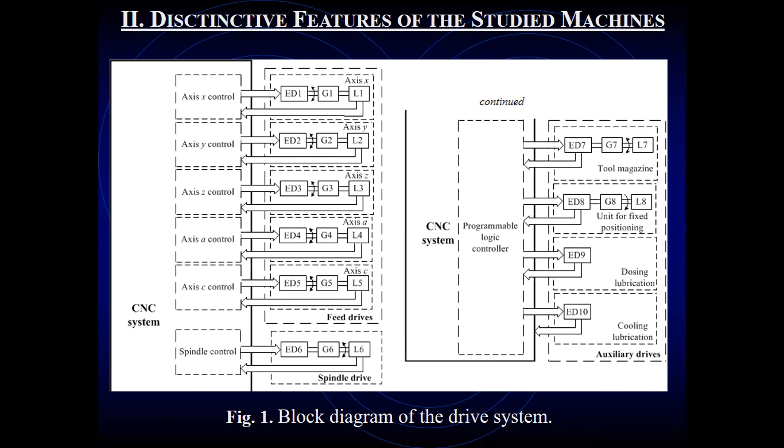Basically, the machining operation depends on the type of machine construction, the geometric shape of the workpiece, the type of tools, and price. They are related to the machining parameters, namely spindle and feed speeds, torque and cutting power, cutting depth, and others. The machining centers enable the process of milling, drilling, boring, and reaming. The appropriate approaches of determining the basic machine parameters in individual operations are similar.

The different milling methods determine the type of machine used for 3, 4, or 5 coordinate milling. The selection of tools depends on the process material and workpieces. The cutting power is divided between the feed drive and the spindle drive respectively.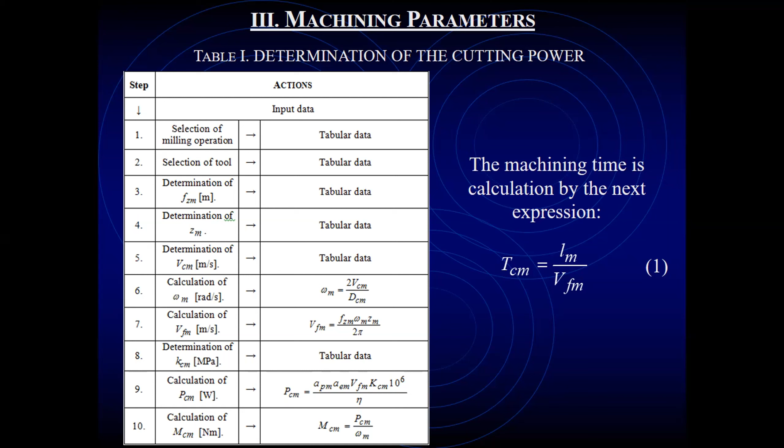The machining time can be determined by equation 1 in the slide, where the parameter Lm is machine length.

The practical application of the studied CNC vertical centers is illustrated with machining of a specified steel workpiece. Usually, several types of mechanical operation are required to obtain the desired geometric shape.

For the full realization of the geometric shape, the following mechanical operations are passed, together with the developed geometric model, and the generated paths are presented in Figure 2.

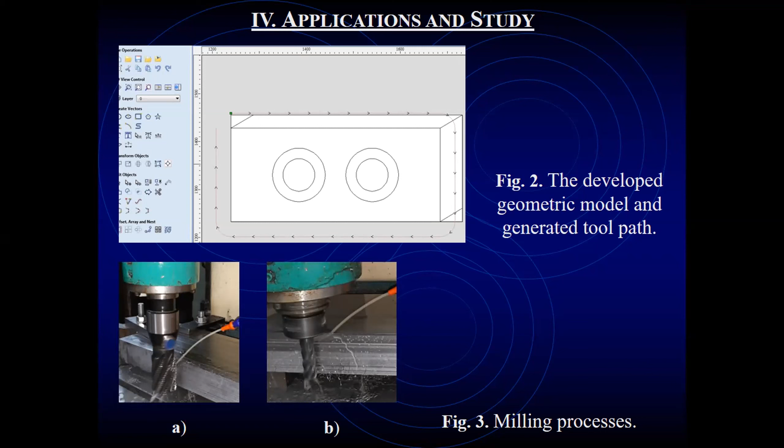Figure 3 shows the processes of rough milling in A and fine milling in B for shaping the overall dimensions of the workpiece. Figure 4 demonstrates both drilling processes with different diameters.

Figure 5 illustrates both milling processes for shaping the upper parts of the workpiece using a rough mill with different diameters of 0.025 and 0.008 meter.

Figure 6 shows the machined workpiece after the presented technological processes. Figures 7, 8, and 9 in the next two slides illustrate some theoretical results reporting the tool life, the cutting speed, and the feed per revolution received with an online cutting speed calculator.

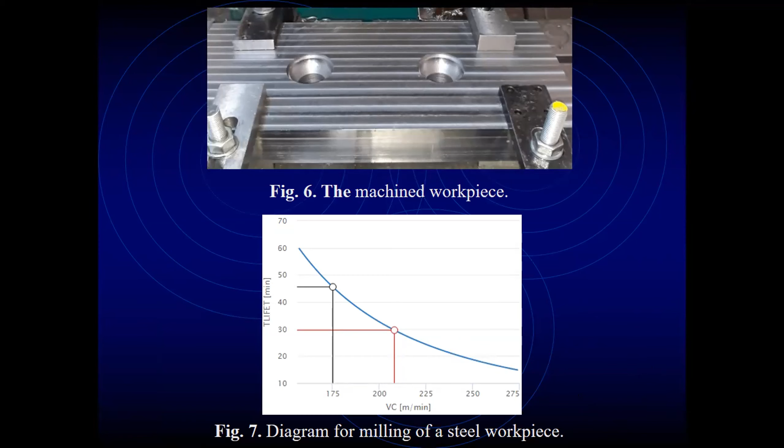Figure 7 presents a diagram for the milling of a steel workpiece at different cutting speeds. Figures 8 and 9 present charts for drilling of steel as the cutting speed and feed per revolution are studied. The received parameters in this case are tool lifetime of 66 minutes and tool life length of 38 meters.

The presented example illustrates the different types of technical operation in the studied CNC vertical machining centers.

In conclusion, the main features of this type of vertical machining center with CNC are described. Based on the analysis of mechanical operations in this machine, an appropriate drive system is presented. The aim of this study is to combine the respective mechanical operations applied and tools used for minimal consumed energy and maximum productivity. The research methodology used includes a theoretical approach and a suitable experimental study.

The practical application of the considered machine tools is illustrated by the coordination of the respective drives based on the developed geometrical model using the Aspire software. The machined workpiece is of a specific steel type. It is processed by applying the necessary mechanical operations for realization of a geometric shape.

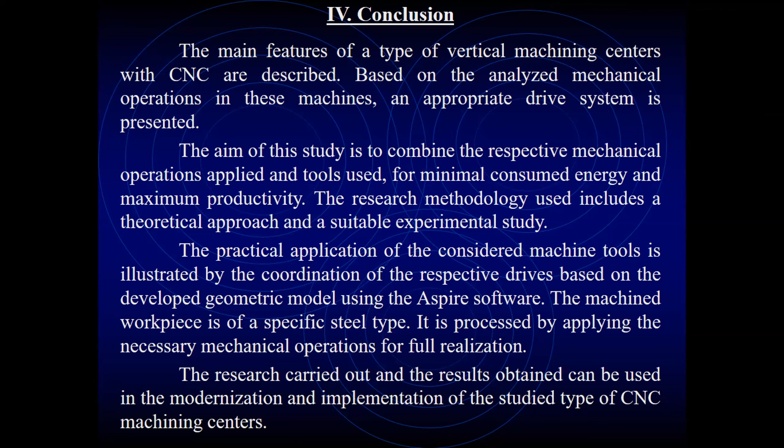The research carried out and the results obtained can be used in the modernization and implementation of this studied type of CNC machining center. Thank you for your attention.